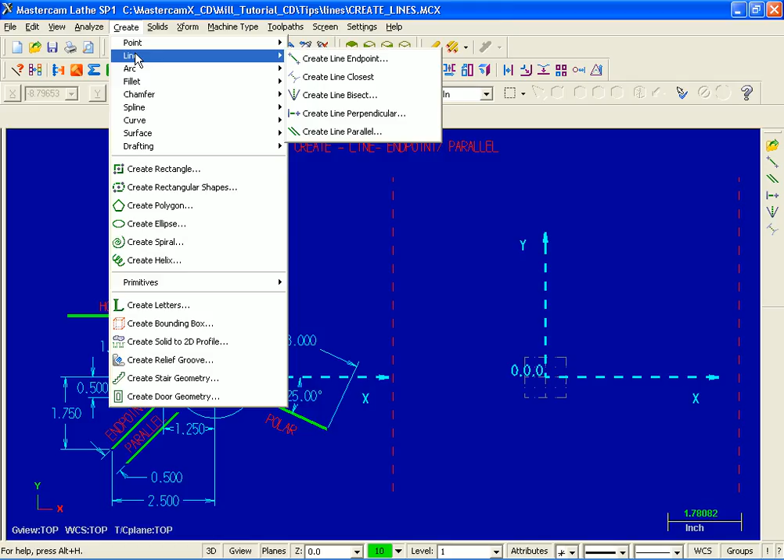Now let's start to create the polar line. Up in the menu bar in Create we have lines and 5 different options. I'm just going to click on Create.

Just down below in the Sketcher toolbar we have the same options. I'm going to select Create Line Endpoint.

Before we continue, if you look over to the right in the MRU at the very top, I could have selected this icon for Create Line Endpoint instead.

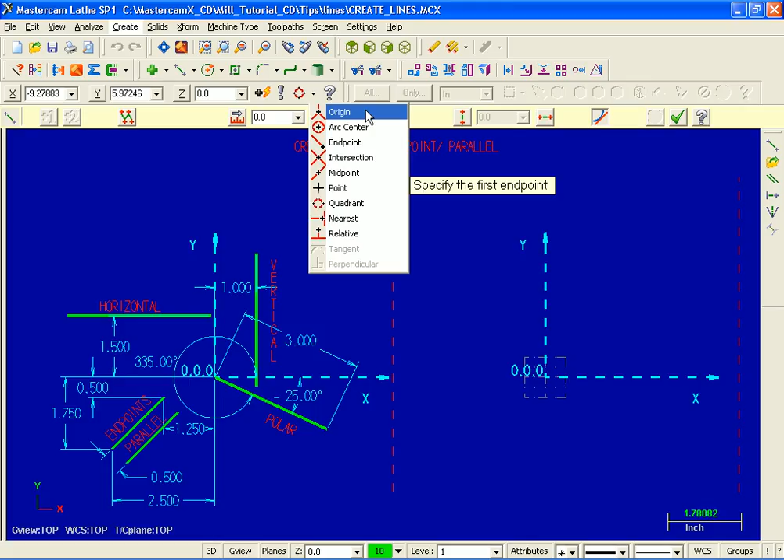Here's my first prompt: specify the first endpoint. I could move up to the auto cursor ribbon bar and input X0, Y0, Z0, but instead I'll slide to the right, open this drop down, and at the very top select origin. So our first endpoint is at X0, Y0, Z0.

Now specify the second endpoint. I'm going to move up to the ribbon bar and click in the white space for length. The length of this line is 3. I'll hit tab on my keyboard, and here we are in the angle section. The angle is minus 25 degrees, and I'll hit enter.

And there's our line. Instead of putting in minus 25, I could have put in positive 335 degrees. Before we move forward, let's review the buttons in the line ribbon bar.

Way over on the left, this button allows us to edit the first endpoint, and just to the right, this allows us to edit the second endpoint.

Just to the right is multi-line. This lets you create multiple lines connected at their endpoints. You can enter a point for the first endpoint of the first line, then a point for the second endpoint of that line. That second point becomes the first endpoint of the next line you create. More on multi-line later in this video.

Now sliding to the right, this is the section for length, and next to it, angle. As we slide further right, this button allows us to create vertical lines, and just to the right, horizontal lines. Moving further right allows us to create tangent lines.

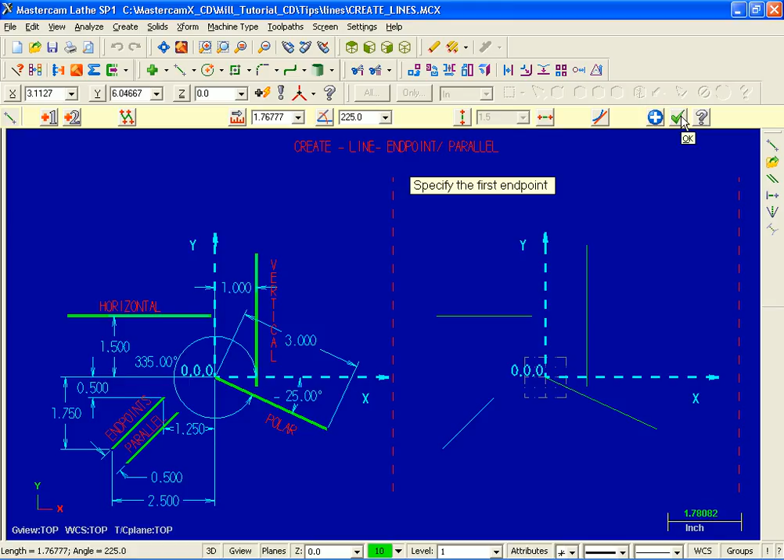Now the next line we're going to create is a parallel line, and it's parallel to the last line we created at a distance of 0.5. So I'm going to open up, and then right at the very bottom down here, create line parallel. Now our first prompt, select a line.

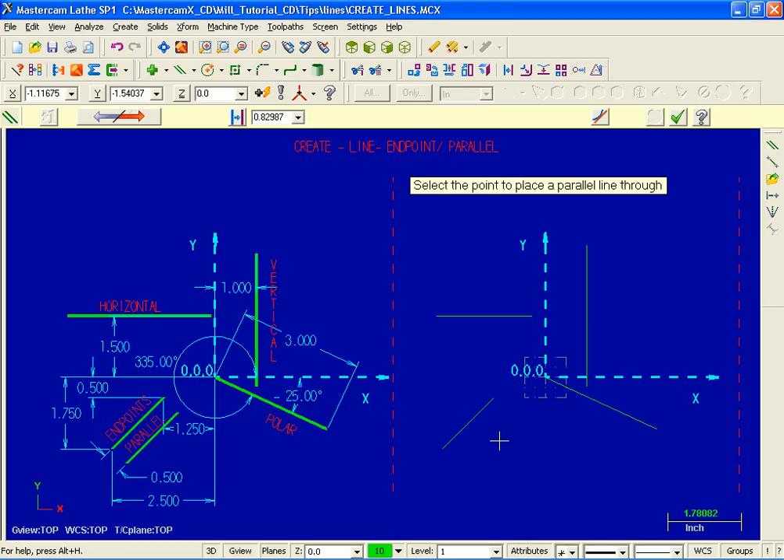I'm going to select this line, and the prompt's changed. Select the point to place a parallel line through. I'm going to pick a point just below this line. Now let's move up to the ribbon bar, and in the distance section, what I'm going to do is type in 0.5 and then hit enter.

Now just to the left is the flip button. I'm going to flip on it. As you can see, the line's flipped over. I'm going to hit flip one more time. Now we've got two lines, and both these lines are 0.5 away from this green line. I'm going to hit flip again, and that's the line that I want. So I'm going to move on up now and pick on OK.

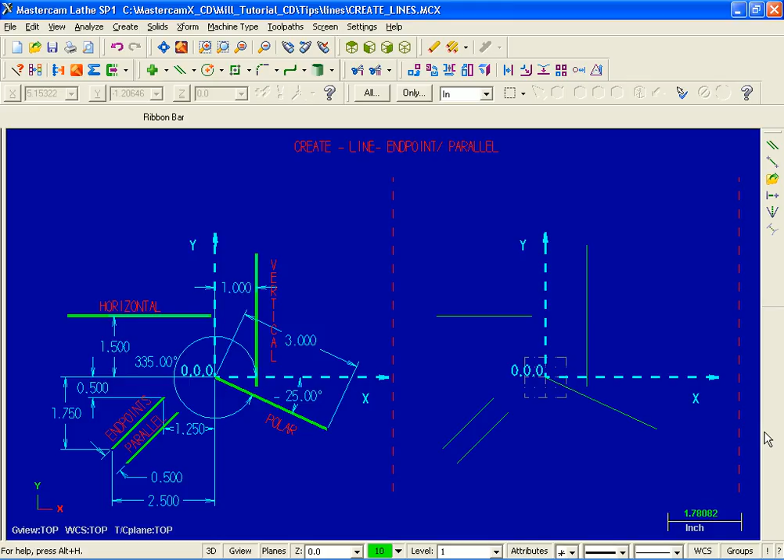What I'm doing right now is hitting the up arrow key on my keyboard to move up to the next example. I have a mouse with a wheel on it, and what I'm doing is rolling the wheel on my mouse forwards to zoom in a little closer.

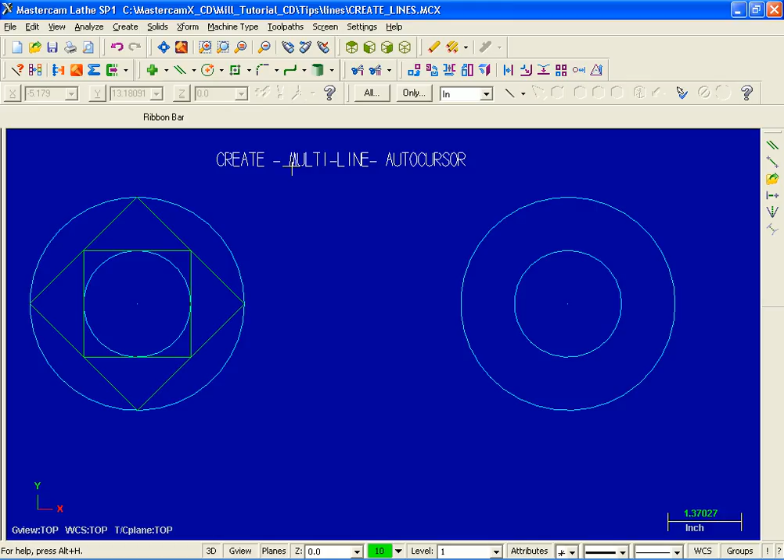So that looks good. In this example, what we're going to do is be creating lines using multi-line, and we'll also explore the functionality of auto cursor. Now on the left hand side we have a large green square and a smaller green square, which we're going to duplicate over here using multi-line.

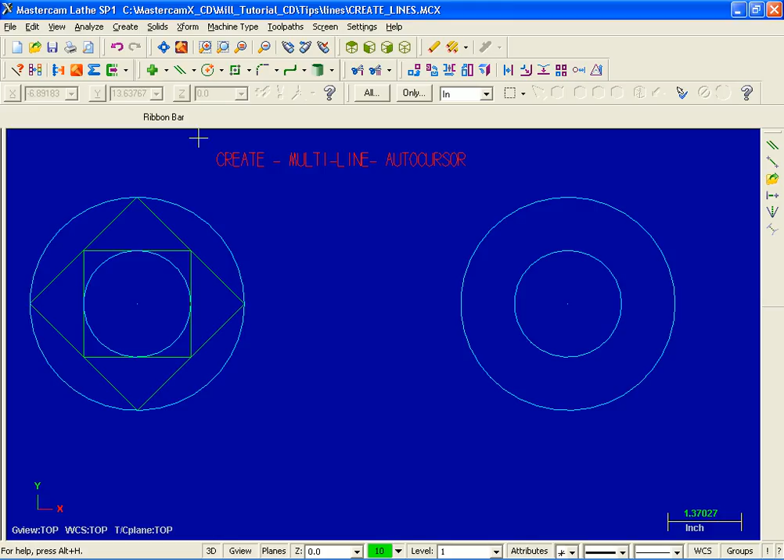Let's move into create line endpoint. Now the first thing that I'm going to do is pick on multi-line. Now specify the first endpoint. As I move over the top of this circle, you can see there is a visual cue that I'm going to snap to the quadrant point on this circle.

If I move over to the left, there's a visual cue for midpoint, and if I move to the center of this circle, there's a visual cue that I'm going to snap to the center of this arc.

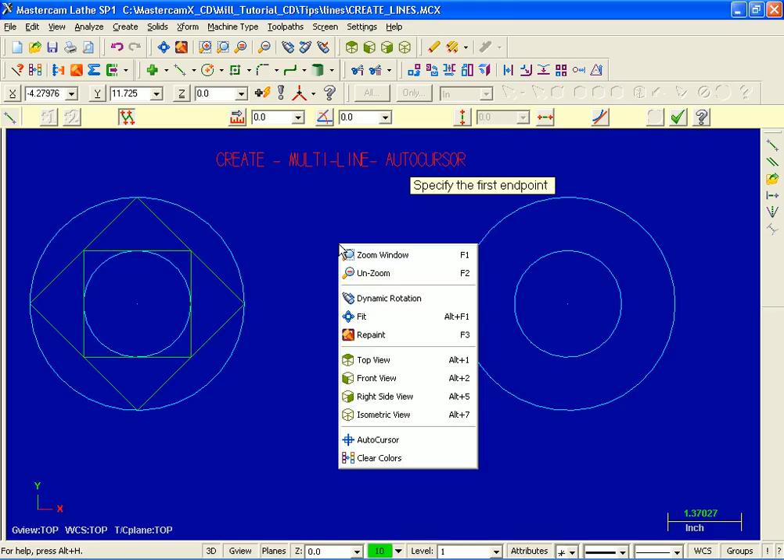What I'm going to do next is right mouse click, and right down the bottom here I'm going to select auto cursor. Now all the auto cursor settings are turned on. I'm going to click on the disable all button, all turned off now, and pick OK.

Now if I move over the top of this circle, the side, center, no visual cues whatsoever. So look, let's right mouse click again. Let's move into auto cursor, and what I'm going to do is put a check against endpoint and put a check against quadrant, and that's all.

Just these two options, endpoint and quadrant. Now I'm going to go down to the bottom. I'm finished here, and I'm going to pick OK.

Now for the prompt, specify the first endpoint. As I move up to the top of the circle, there's my visual cue for quadrant. I'm going to pick it. As I move on down to the left, there's my visual cue for quadrant.

I'm going to pick on down at the very bottom, and there's another visual cue that pops up. I'm going to pick it. Over on the right, there's the visual cue for endpoint. I'm going to pick it, and let's move back to the top, and there's my visual cue for endpoint.

Now in this situation there is more than one point that lies within the detection range of the cursor, endpoint and quadrant. In these cases, AutoCursor uses a specific order to detect and snap to points. The order starts with point entities, then endpoints of curves or lines, then midpoints, and then quadrants.

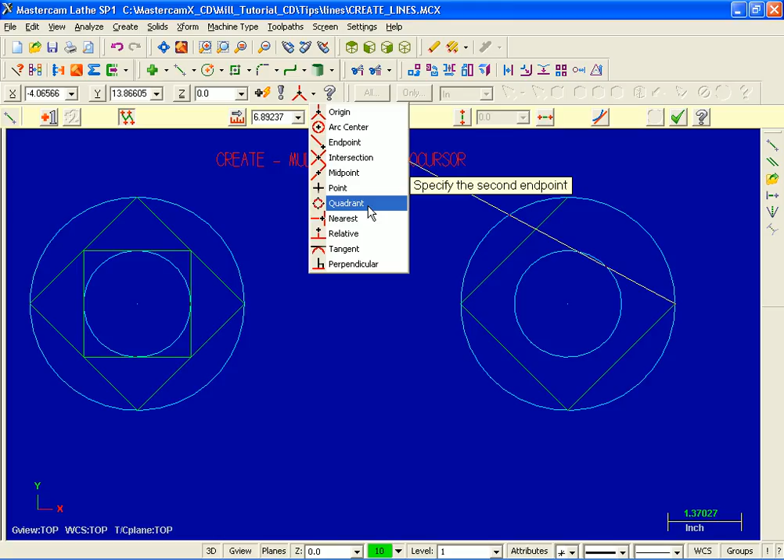So what's happening here is I only have quadrant and endpoint turned on, but endpoint is closer to the top of the list. If I wanted to specifically pick the quadrant point, I need to move up to the AutoCursor ribbon bar. I'm going to open up this dropdown, and here we have a variety of options for snapping to particular points. I'm going to pick quadrant. Now select an arc. I'm going to pick this arc, and as you can see it's snapped to the top there. I'm going to pick OK.

Now let's move over to the left, and the next lines I'm going to create is this small square. So let's go back up again. I'm going to hit the toolbar icon, create line endpoint. The first thing I'm going to do is check mark multi-line.

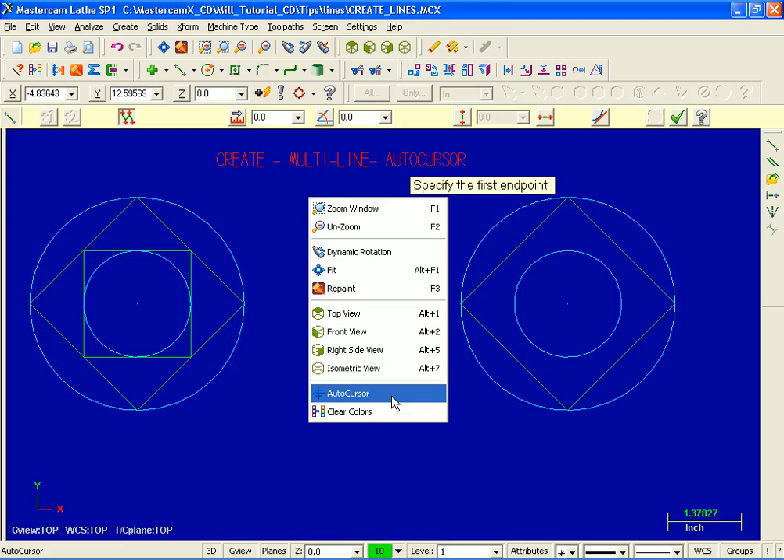Now this line on the left goes from midpoint to midpoint, and as you can see, as I'm hovering over the midpoint of this line, there's no visual cue for midpoint. So I'm going to right mouse click and go back into AutoCursor again. I'm going to turn everything on, check enable all, and everything has got check marks on it, so it looks good here. I'm going to pick OK.

Now watch as I move over, there's the visual cue for midpoint. I'm going to click on it. Now for the second endpoint, as I move on over, there's the visual cue for quadrant, that's tangent, and there's my cue for midpoint. So I'm going to pick it.

I'm going to slide on down. There's my visual cue for midpoint. I'm going to pick it. That's tangent, don't want that. As I move on over, there's my visual cue for midpoint. Got it. I'm going to pick it, and let's move on up, and there's my visual cue for endpoint. Perfect, I'm done here.

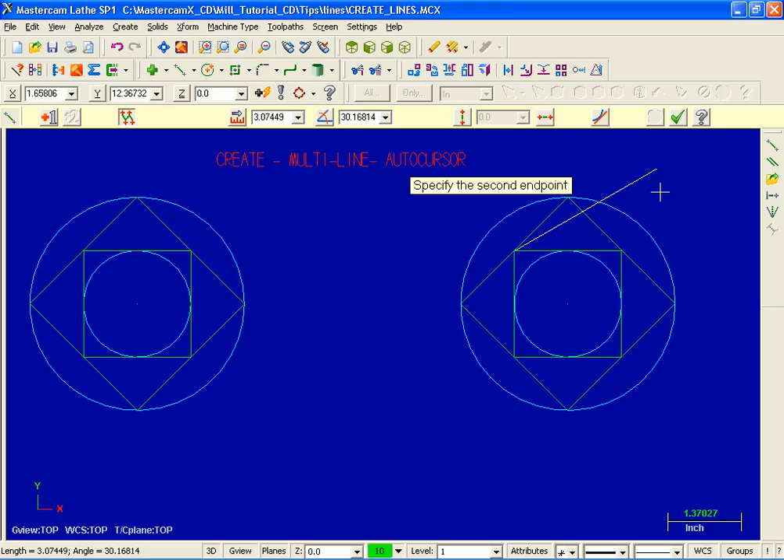So back up to the ribbon bar, and pick OK. Now let's go back up, open up this dropdown. The next one on the list, create line closest. I'm going to click on it. This function creates a line between two entities at the closest intersection.

Let's go back up again now, and the next one down is create line bisect. This function creates a bisecting line between two existing lines. So here's my prompt, select two lines to bisect. I'm going to move on to the left here and pick this line, and I'll pick this line up here.

Now Mastercam creates multiple possibilities for bisecting lines, and I'm being prompted to select the ones I want to keep. For example, here's one line, the second one, third, and here's the fourth line. So what I'd like to do is keep this line. I'm going to pick on it. Just going to move on up and do a repaint. And I'm finished here, so I'm going to pick OK on the ribbon bar.

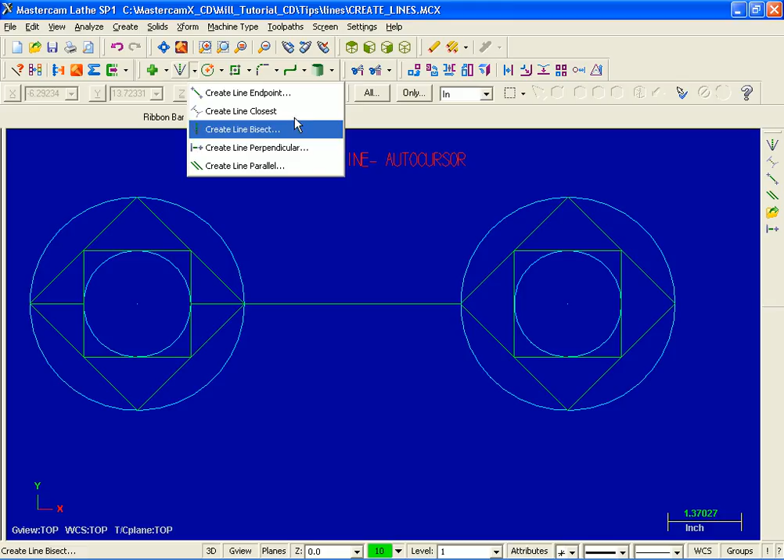Let's open up. Next on the list, create line perpendicular. Now we can use this function to create a line perpendicular to existing entities by selecting an existing line, an arc or a spline, and then clicking in the graphics window to create an endpoint. So for this first prompt, I'm going to pick this line, and now sketch a point.

What I'm going to do is move on down and snap to this point. Now let's just move up to the ribbon bar, and for the length what I'm going to do is input 1, hit enter. Now let's check out the prompt on the screen.

Select which line to keep. So I've got one line here and also another line up here. I'd like to keep this line. I'm going to pick on it, and it looks good. I'm just going to move on up to the ribbon bar and pick OK.

Now, last one on the list, create line parallel. Here's the prompt: select a line. So I'm going to pick this line here. Now for the next prompt, select the point to place a line through. I'm going to pick a point above.

I'm going to move up to the ribbon bar, and for the distance I'm going to input 1 and hit enter. Now if I just slide over to the left and click on the flip button, there it is. If I click it again, we got two lines now. Let's click it again. I'm going to keep this one. So I'm just going to move on up. I'm done here, I'm going to pick OK.

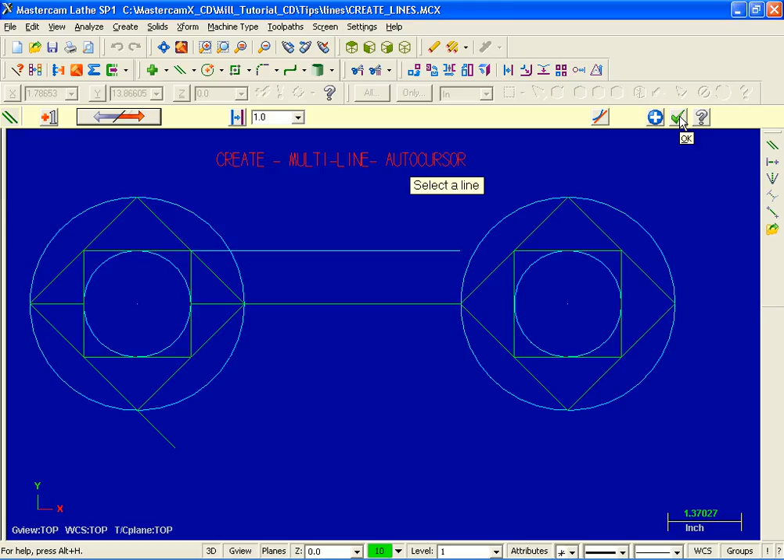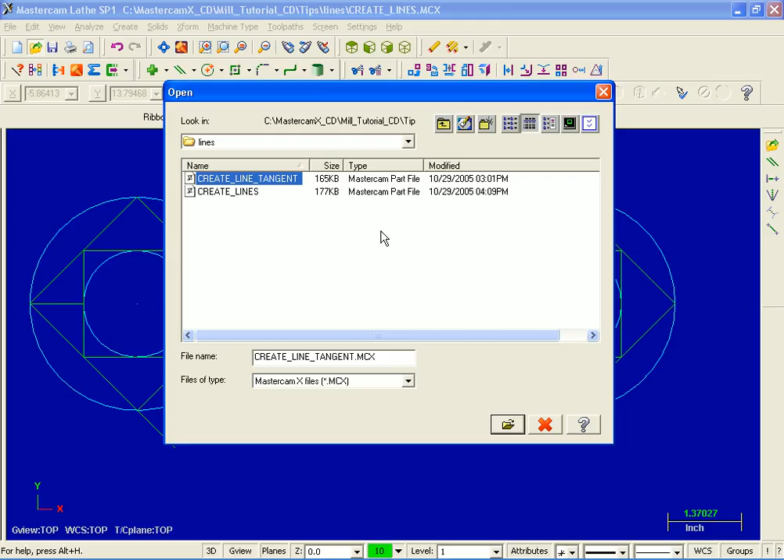What I'd like to do now is move on and demonstrate tangent lines. I'm going to move up to the top and click on the toolbar icon for open. I'm going to select this Mastercam file, create line tangent, and at the very bottom of this dialog box I'm going to hit the open button. Now, do I want to save this file? No, I'm going to pick on no.

Now let's look over on the left hand side. We've got a series of lines that I'm going to duplicate on the right. For example, the line I'm highlighting now at the bottom is tangent to this arc and this arc. Just above it, this line, same deal, it's tangent to this arc and this arc. Just above, this line is tangent to this arc.

It's sitting at an angle of 10 degrees and the line is 2 inches long. If we move over to the left, this line is tangent to this arc and it's passing through the origin, 0 in x, 0 in y, z 0. Now over on the right hand side, our x0, y0, z0 is at the center of this grid, our origin.

So let's move on up, open up this drop down, and I'm going to move into create line endpoint. Now up on the ribbon bar, the first thing I'm going to do is select tangent.

Now the first line I'd like to create is this line. As you can see, it's tangent to this circle and this circle. But what's happening right now is there's a visual cue that I'm going to snap to this quadrant point, which I don't want. So what I'm going to do is hold the Alt key down, and as I move over the circle now, there are no visual cues, which is perfect.

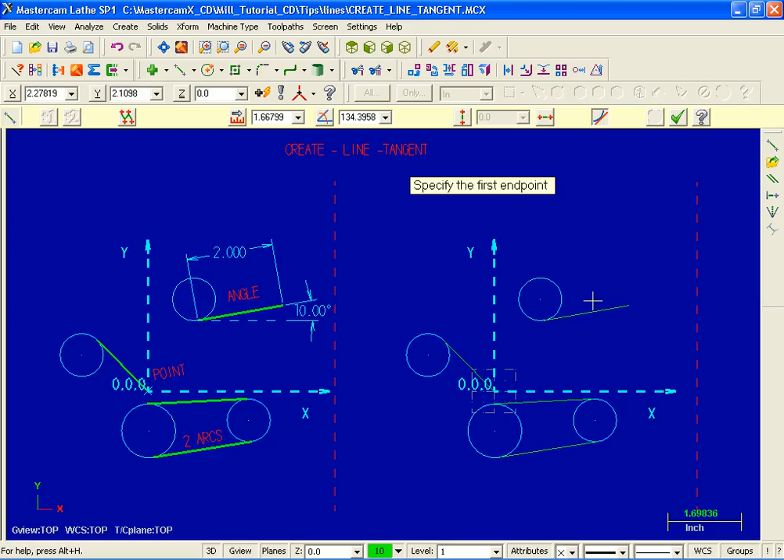So there's our 1, 2, 3, 4 lines created. Now I'm done here, so I'm going to pick OK. And that finishes up our excursion of creating lines. Thanks for watching.